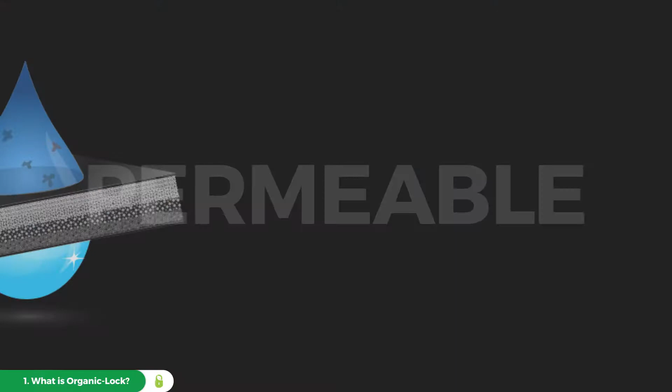Organic Lock is a patented powdered binder made from a renewable plant resource and a mixture of proprietary additives. It's designed to be blended with crushed aggregate to create natural-looking pathways and surfaces. The binder locks the aggregate in place to minimize erosion and minimize project site maintenance. It's permeable, ADA compliant, and qualifies for LEED points.

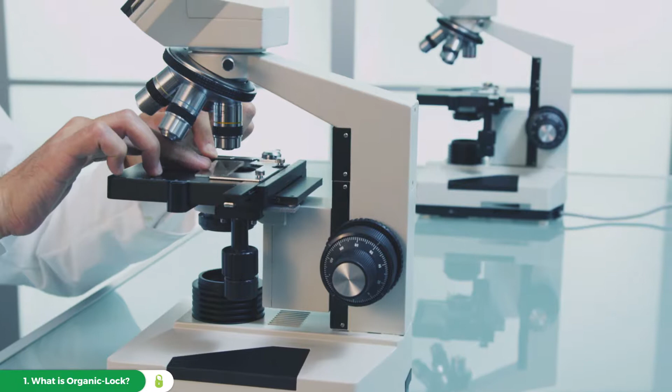The patented formula was developed from more than a decade of research by agricultural scientists from the University of Guelph, as well as the Federal Research Lab at Agriculture Canada. It's been used on successful projects around the world, from the pathways at the Brooklyn Bridge Park to the Disney Amphitheater in Shanghai, China, to the green roof on Toronto City Hall.

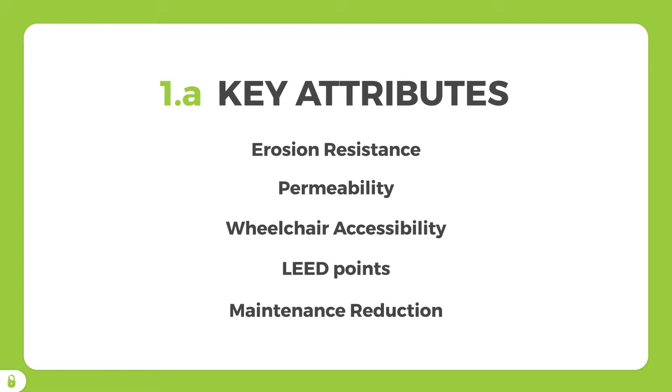As the water permeates the aggregate, it gets absorbed by the Organic Lock binder and creates a gel that coats the aggregate particles. The gel expands in size and holds the aggregate particles together, which significantly reduces erosion. Once the gel forms to its maximum swell volume, it's unable to take on any new water, so the excess water passes directly through the system down into the groundwater table.

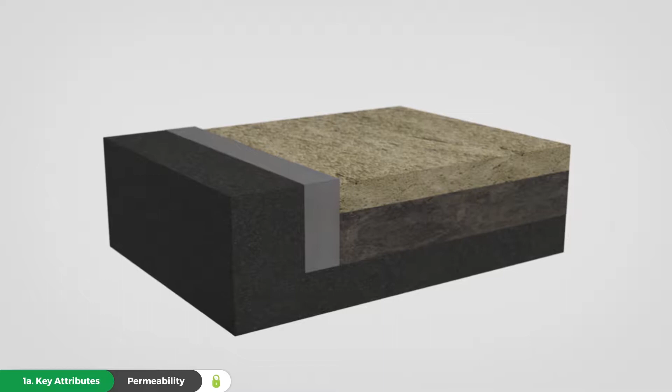Over time, the gel releases its water through evaporation into the atmosphere and through percolation into the groundwater table, recharging the system to be ready for the next rainfall. The structure of the aggregate combined with the gelling strength of the Organic Lock binder creates a stable surface that passes ADA wheelchair compliance and is suitable for a range of vehicle traffic.

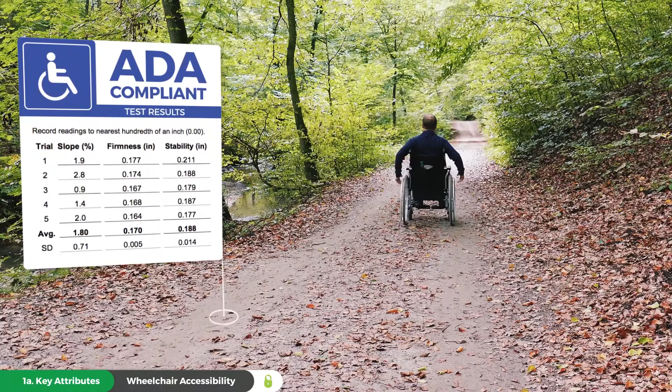LEED points are available for a variety of means depending on the specifics of your project choice. Organic Lock is activated and reactivated each time it comes in contact with water, which makes for a simplified maintenance program.

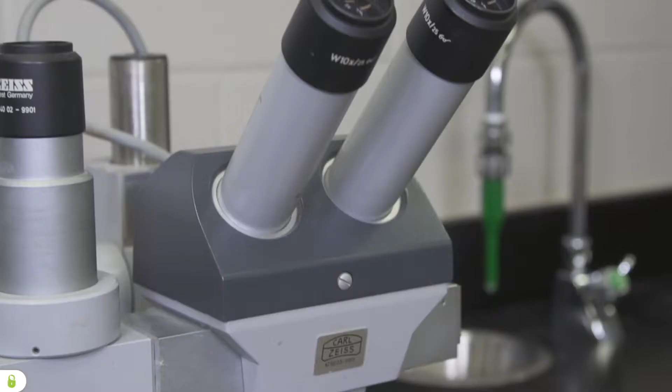More than a decade of research has been completed at agricultural universities as well as federal research facilities with a focus on biopolymer sciences and their interaction with aggregates. The binding strength of Organic Lock is closely studied in the laboratory and the field for a variety of different properties. Erosion resistance, strength and stability, as well as permeability analysis are at the front lines of this testing.

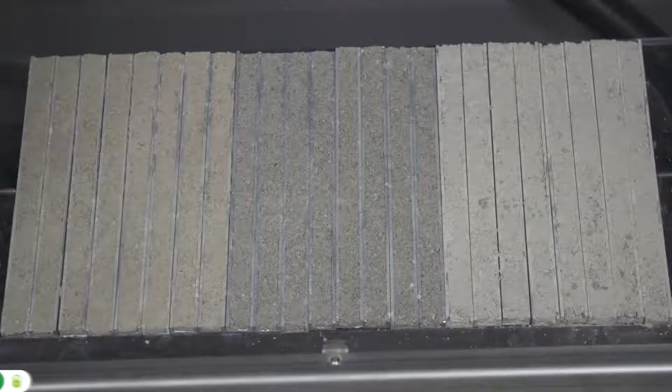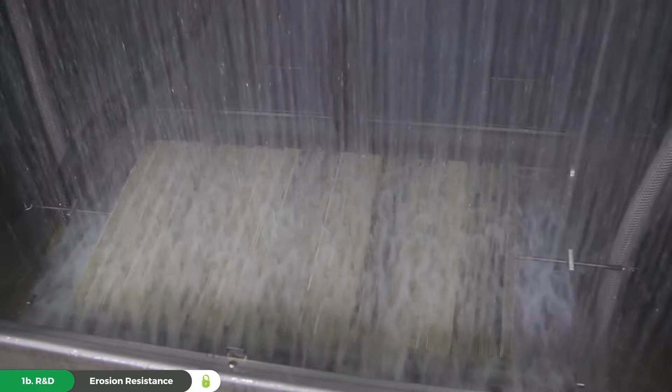The core focus for the development of the Organic Lock formulation is on its ability to resist erosion due to excessive rainfall. Envirobond uses a customized rainfall simulation device that provides consistent and comparative stress to each sample studied. By preparing samples that are subjected to a controlled rainfall simulation, Envirobond researchers have been able to understand the relationship between the binding strength and its ability to resist erosion. This has led to a patented formulation making Organic Lock the strongest organic binder on the market today.

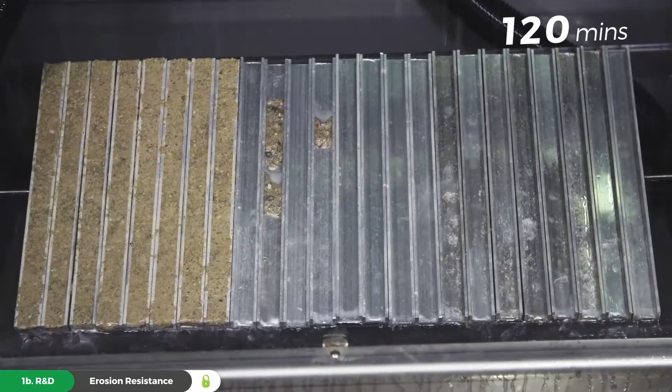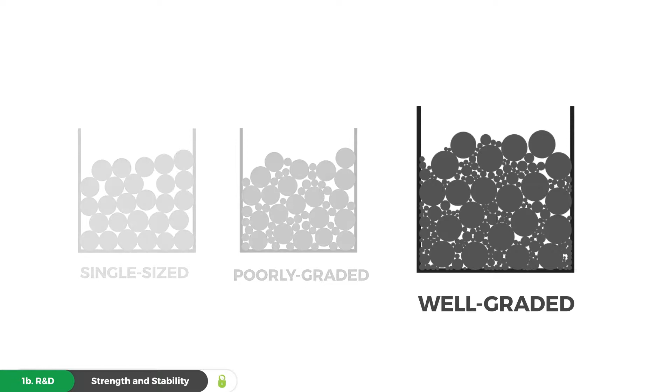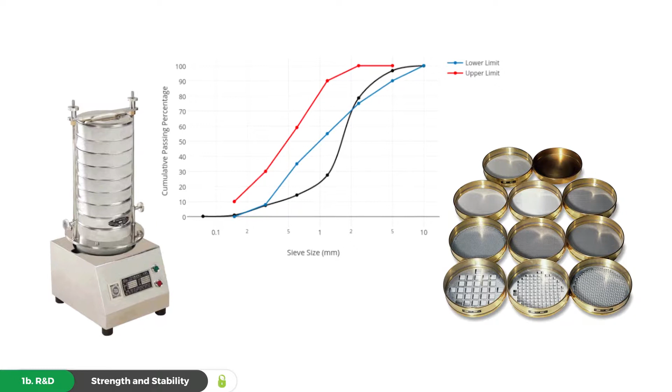Organic Lock blended aggregates derive much of their strength from the aggregate itself. The gel works best with the natural interlocking ability of well-graded crushed aggregate particles, which create an optimally structured surface. Only aggregates that meet the optimal gradation guidelines, which specify a detailed matrix of particle size distribution, are approved to become Organic Lock blended aggregates. Performing sieve analysis experiments on potential aggregates creates a strong understanding for expected performance in the field. Following these guidelines allows for a wide variety of options, taking advantage of local aggregate sources.

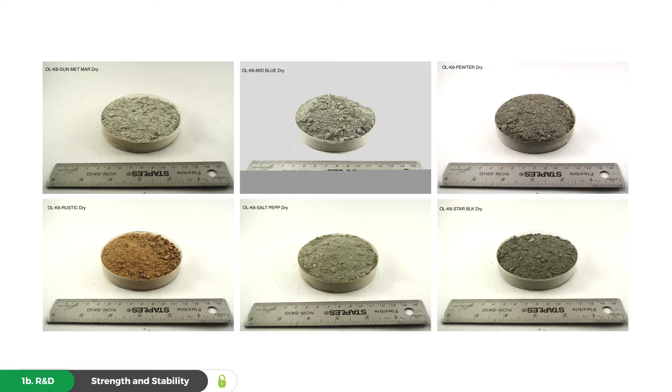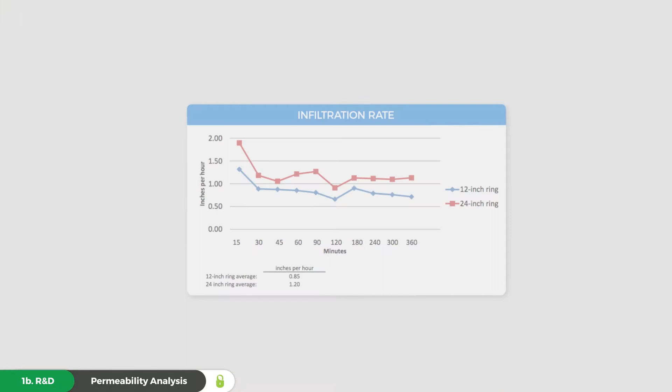In recent years, permeable surfaces have steadily become more relevant. Concern for the environment, especially water resources, has massively contributed to their popularity and promotion around the world. Because of this, water surface permeability is a significant issue for surface material choices. The water permeability rate of Organic Lock blended aggregate, determined by an independent ASTM standard double ring infiltrometer test, shows a rate of 0.85 to 1.2 inches per hour, allowing it to be installed in sensitive areas where water needs to get through.

When getting the pre-blended Organic Lock aggregate delivered by a licensed Organic Lock dealer, you'll need to pay attention to moisture content and optimal site preparation before the installation process can begin. Adding the optimal amount of moisture to pre-blended Organic Lock aggregate activates the powder into a gel that forms between the particles. The delivered aggregate will always have a beginning moisture content that may need to be optimized.

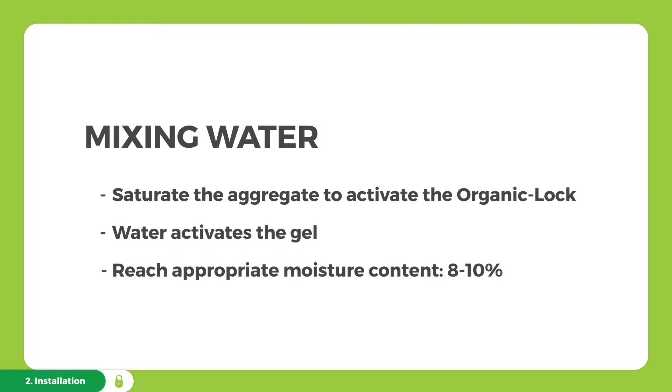To achieve the optimal water content, it's important to have an understanding of your starting moisture percentage. An appropriate ending moisture percentage will be between 8 to 10%, but is best established with a field test. The optimal way to establish ideal water content in the mixed product is with a snowball test. The snowball test is the act of picking up the blended aggregate and using both hands to firm and form a snowball. Start your first batch by adding small metered increments of water until you achieve a successful snowball.

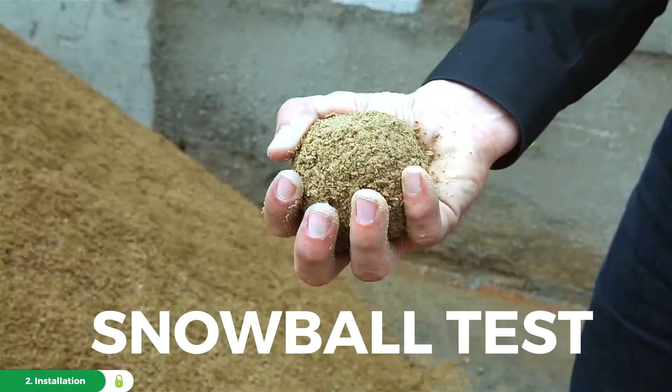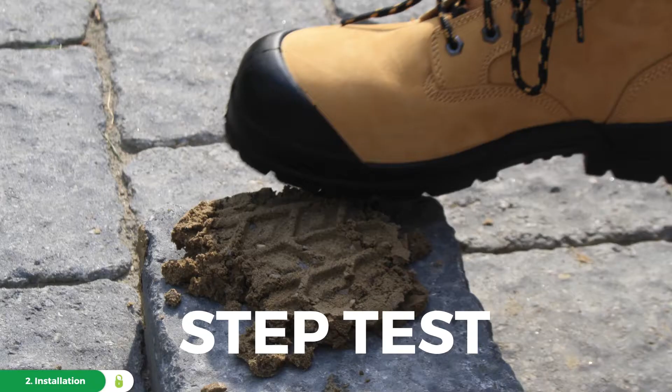The best thing you can do is figure out the exact water to add on the very first batch. Then, simply replicate it for each subsequent batch. If you find yourself with a batch that is too wet, the best thing you can do is add further dry material into the mix to dilute the moisture and return to a proper snowball. Now that you've got a proper aggregate, homogeneously blended with the proper amount of Organic Lock and water, the next step is the installation.

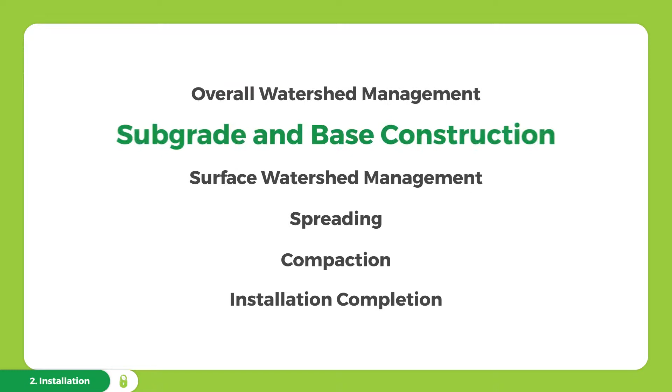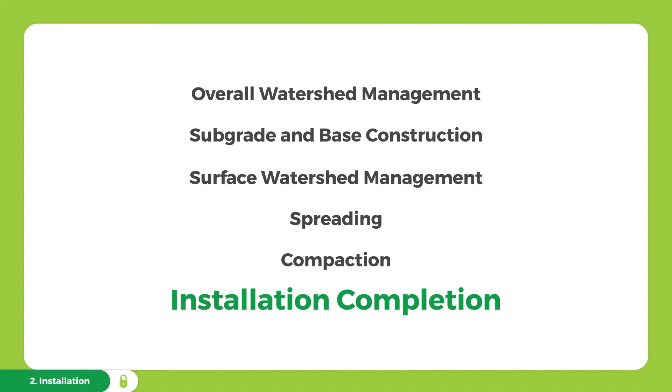The key elements for successful installation are overall watershed management, subgrade and base construction, surface watershed management, spreading and compaction, and finishing on the final spray for the completion of the installation. Watershed management is a simple but very important element of any successful installation. Managing the surrounding water will dictate the longevity of your surface material. As with any surface, you'll want to avoid any sitting water through proper slope management, but you also want to prevent continual flowing water in recurring and ongoing spots. This can be avoided through the use of swales, crowns, culverts, and drains in the surrounding environment.

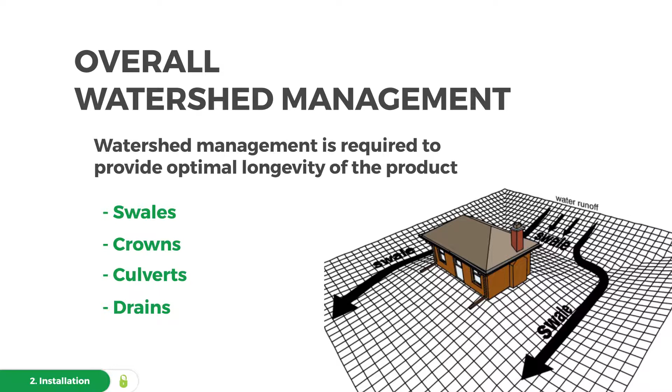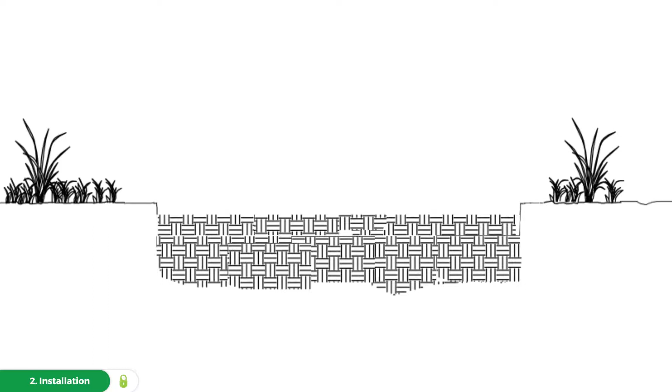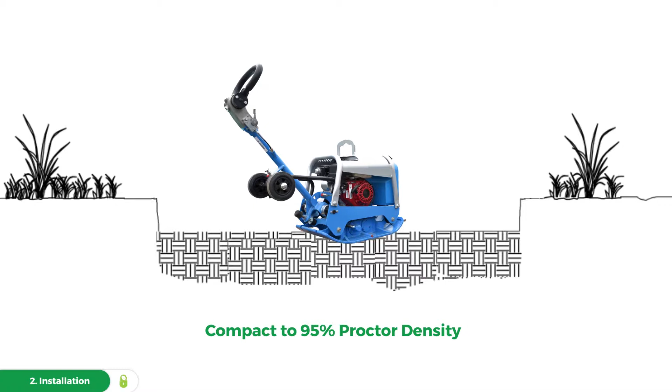The first step of installation is to excavate and properly prepare the subgrade to be ready for the installation. Excavate the proposed area to a depth related to your installation goals, which will allow for the proper depth of base aggregate, followed by the Organic Lock blended aggregate. Before adding in your base aggregate, you'll need to compact the subgrade to a 95% modified Proctor density using a compactor. Once your subgrade is compacted, you'll install your base layer at the depth required for your particular traffic type, as found in the related specifications.

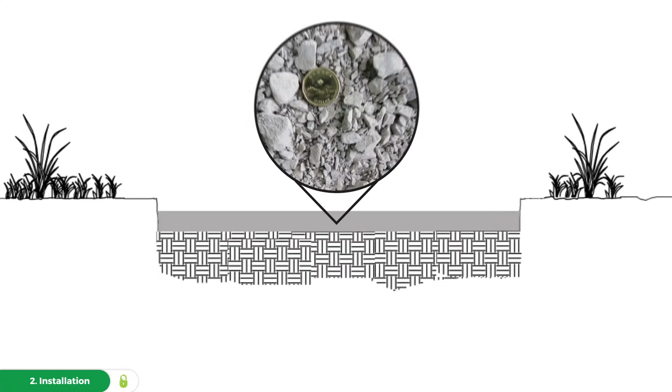The base material type is listed in the specification as your region's DOT recommended crushed granular road base. An example of this would be 3/4 crusher run or granular A material, with the most important aspect being the inclusion of fines in the aggregate material itself. In situations where the base layer calls for greater than 4 inches, you need to install the base in 3-inch lifts. Be sure to apply a fine water spray in between the lifts to create cohesion while optimizing the compaction. Compaction should be done with a vibratory compactor or minimum 1-ton roller and needs to achieve that 95% Proctor density.

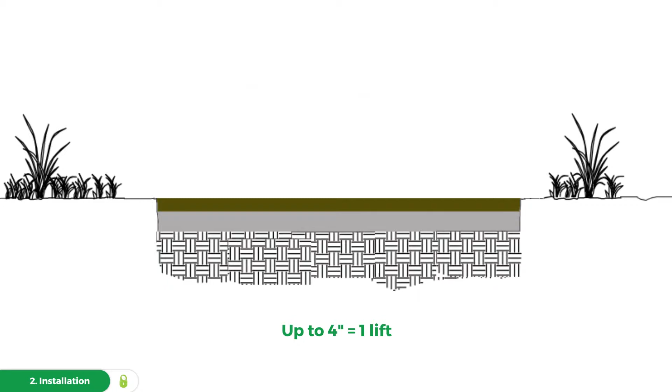With the successfully installed base in place, you can now install the Organic Lock blended aggregate. If you're installing up to 4 inches deep, you can install in one lift. If you're installing greater than 4 inches, you should do this in equal lifts with a minimum of 2.5 inches and a maximum of 4 inches per lift, with an additional soaking in between each lift.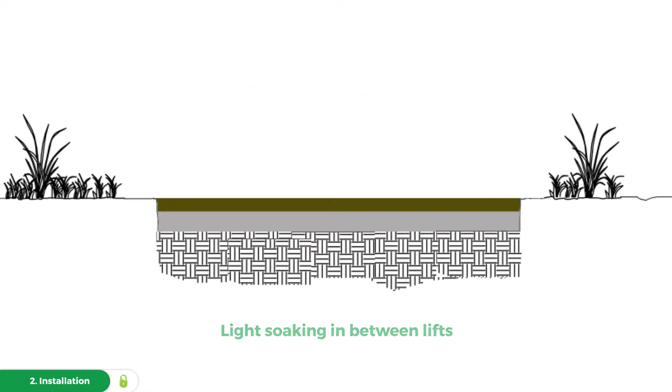It's always important to understand the effects of Mother Nature surrounding a project. Things like topography, ground cover, and canopy cover can have significant impacts on water flow over your project surface. It's important to guide that water flow where needed and avoid low areas, as sitting water on a pathway system is never ideal. Proper watershed management is best achieved by installing a crown or cross slope to divert the rainfall water to flow off the side of the surface.

An important note is to be aware of any man-made water sources that may have an effect on the area. Things like sprinkler heads that are facing your surface can have detrimental effects with long-term pooling. It's heavily advised to adjust this flow away from the product surface.

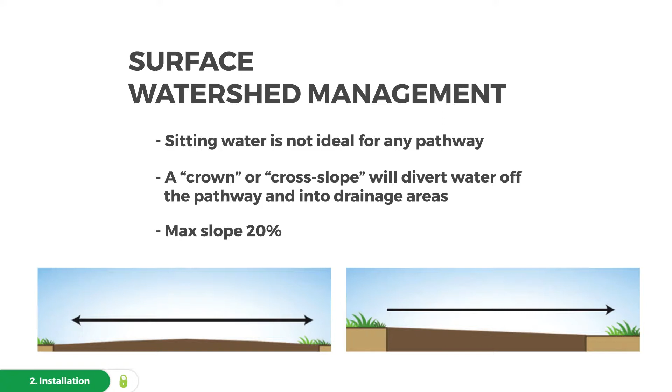The maximum slope that is acceptable for an Organic-Lock blended aggregate application is 20%. For slopes that are 10% or greater, we recommend installing runoff diverters, which are materials such as railway ties, metal troughs, or equivalent, embedded in the pathway at a 45-degree angle to prevent water gaining momentum, which can accelerate washout damage.

To determine how much product you'll need for your project, you can use the product calculator on the organiclock.com website under the Resources tab. If you know your square footage and traffic type, just go to the Resources section and drop down to Product Calculator. Select your traffic type and enter your square footage to establish your product quantities.

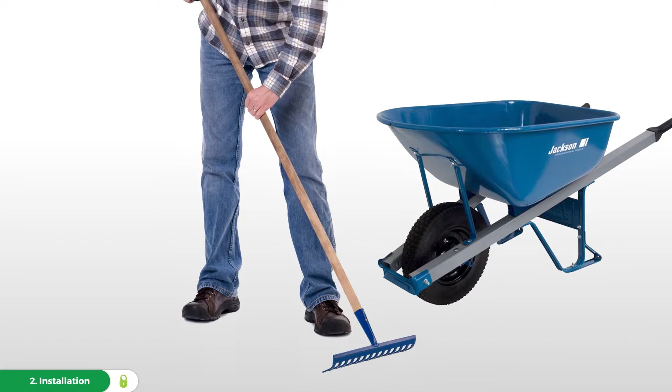In order to get to the proper compacted depth, understand that the aggregate will typically compact 20 to 25% depending on aggregate type, gradation, and starting moisture content. For smaller projects or tight spaces, it's possible to use a rake and wheelbarrow to spread the aggregate. However, extra precautions should be taken to ensure depth consistency over the entire project, as man-made installations can be prone to error. On larger projects, it's ideal to spread the material using a consistent mechanical means.

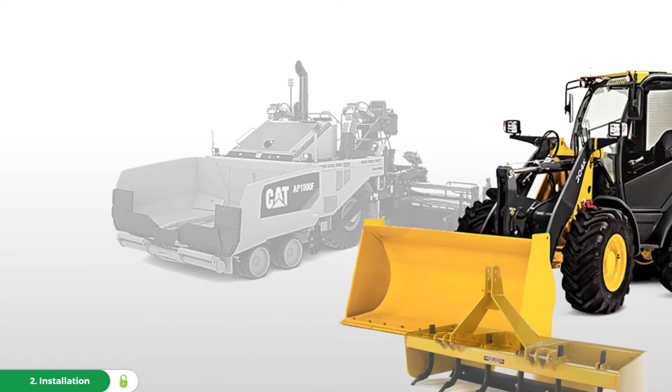Although using a paving machine is going to provide the most consistent results, this may not always be available. Where this is the case, back-dragging the blended aggregate can be done with a front-end loader or a box Gannon attachment. Since the material is being pulled behind machinery, there can be compaction issues as the tires drive over the material. This is something to be carefully considered and minimized wherever possible.

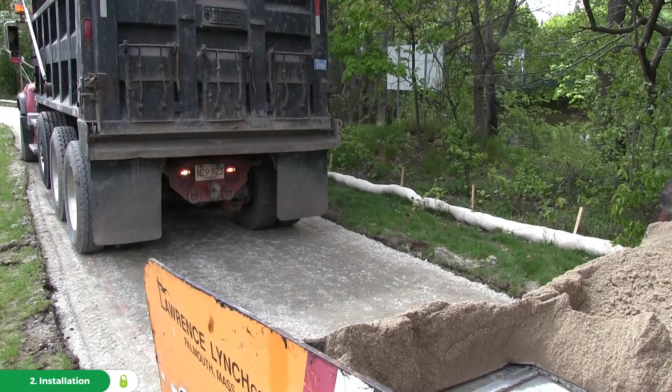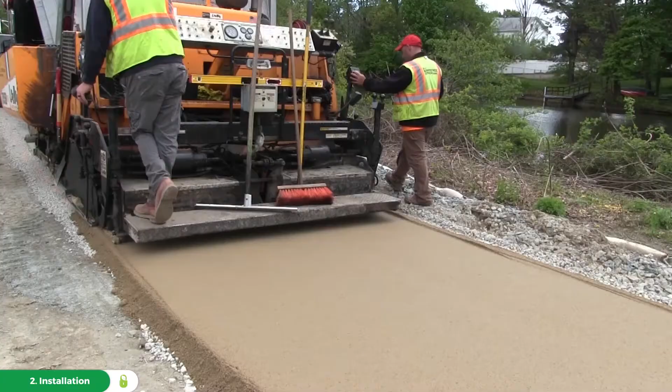Although there are multiple ways to spread the blended aggregate, for larger projects, the use of a paving machine such as an asphalt spreader is definitely ideal for consistency and efficiency. Using an asphalt spreader allows you to have the pre-mixed and pre-hydrated material delivered in a truck directly to the spreader. The material is dumped into the spreader where it is then dispersed at a set height on the prepared base. The asphalt spreader provides no additional compaction on the material while it moves along dispersing at a consistent depth of product. For larger projects, you can arrange larger trucks to continually feed the spreader as it moves down the installation.

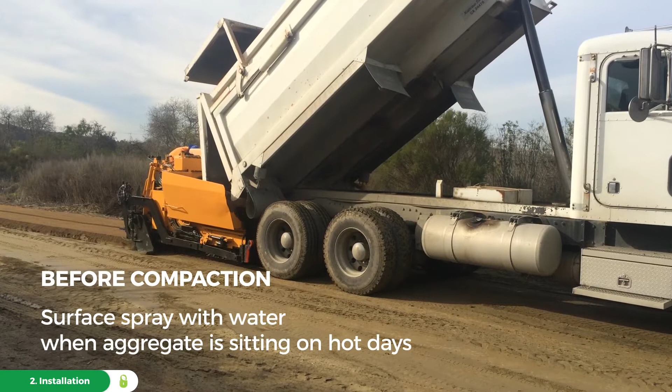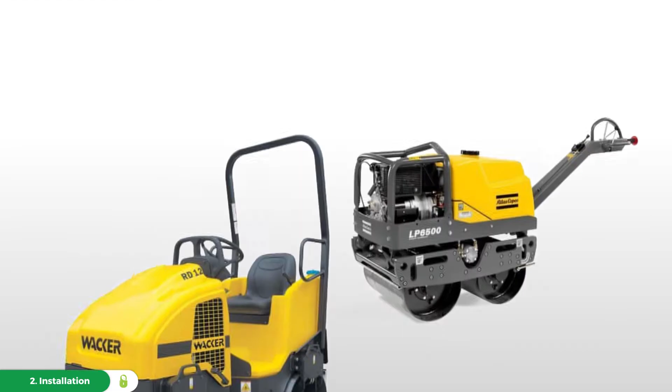Because the water is already blended into the aggregate, it's immediately ready for compaction after spreading has occurred. However, if during spreading the moisture levels of the aggregate drop because of ambient temperatures, for example on hot or really dry days, it's advised to lightly spray the surface to increase the hydration to optimal levels before the compaction. Compaction is done with a minimum 1-ton roller. This should be a static compaction and not a vibratory one, as the vibration can disassociate the bond.

If during compaction you're finding significant ruts, the material is moving around like jello, or perhaps is sticking to the roller as it moves, these are all signs of too much moisture. In this case, you should simply allow time for some of the water to evaporate out of the mixture. If it doesn't have enough moisture, you'll be seeing lines and cracks consistently throughout. To fix this, you can provide an even and light spraying of water over the areas of issue.

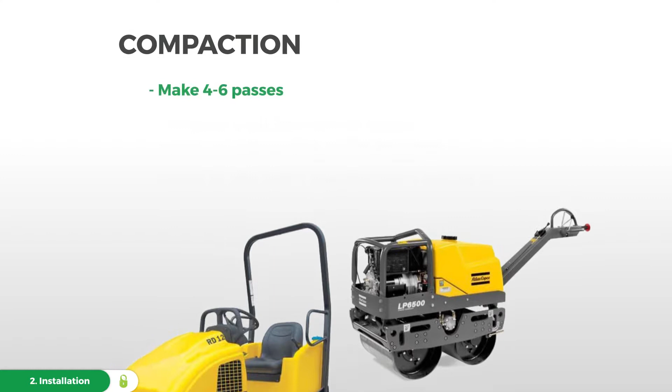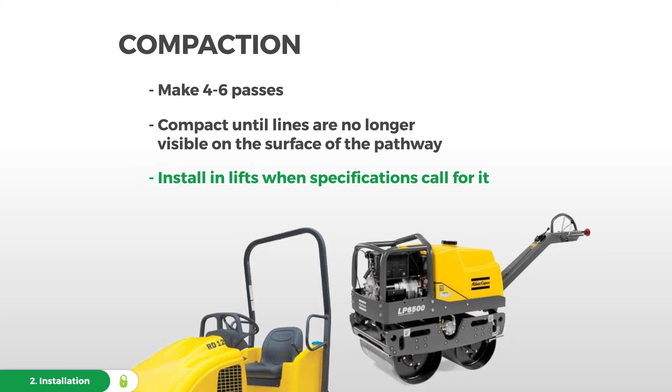Make 4 to 6 passes with the roller until you no longer see any lines on the surface. Pay close attention to the installation specifications to make sure you compact in lifts for any installation above 4 inches in depth. Hard to reach areas should be compacted using a hand tamper or equivalent. To complete the installation, you'll want to do your final soaking. The purpose for this is to make sure that any of the top layer material that wasn't properly hydrated gets a top-down soaking to make sure it's activated and can settle into the rest of the mixture.

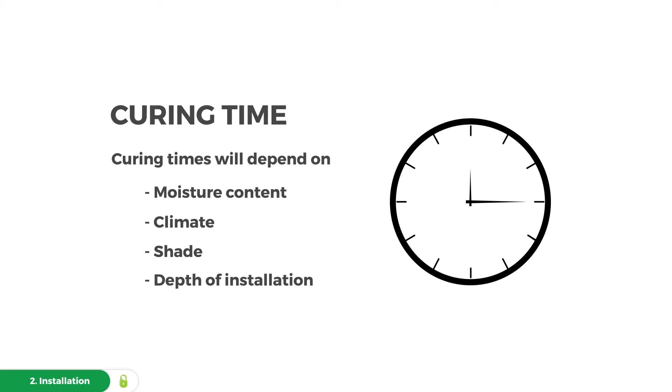Last comes the curing time, or in better terms, the time before first use. This actual time depends on moisture content of the aggregate, climate, canopy cover, and the depth of the installed material. However, we generally say 24 to 72 hours is the standard, but the longer is always the better. To establish timing for first use, simply walk on the material and feel if it's firm enough to allow traffic. If the material is dry on the surface but still feels a bit spongy below, then it's a good idea to leave it to cure for another day.

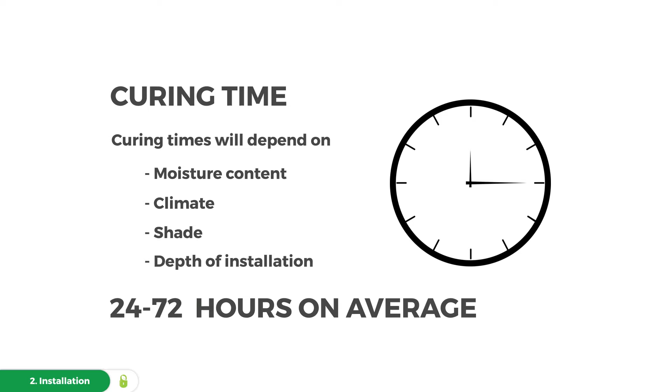Directly after the installation, the aggregate surface will be smooth because of the weight of the fresh compaction. As the surface weathers with traffic and time, the larger particles of the aggregate will loosen on the surface to create a natural look and feel.

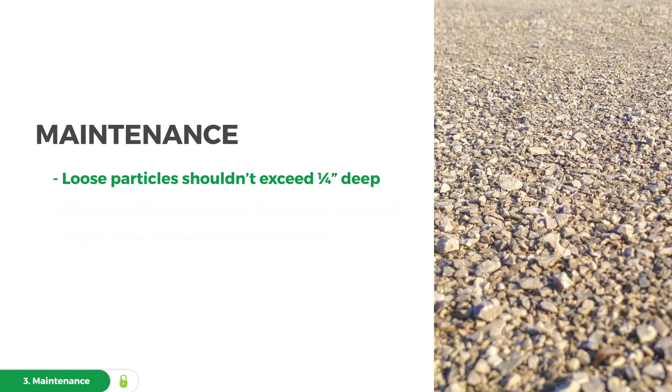It's important to realize that all outdoor products require some level of maintenance analysis. The loose aggregate particles on your surface should not exceed 1/4 inch in depth. If material exceeds 1/4 inch, redistribute the particles over the entire surface, water to 1 inch depth, and compact with a roller of no less than 1,000 pounds.

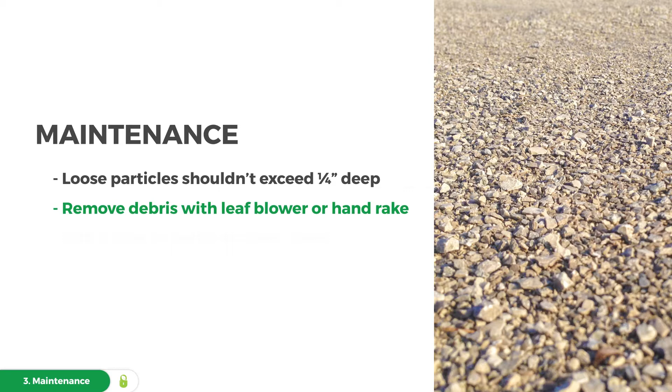You can remove grass clippings, soil, debris, or organic matter by mechanically blowing or hand raking as needed. When plowing snow, use a shoe lift or rubber baffle on the blade of the plow to lift the blade up 1/4 inch off the surface. Extra precautions should always be taken after the first snow and last snow of the season, as this is when the material is most prone.

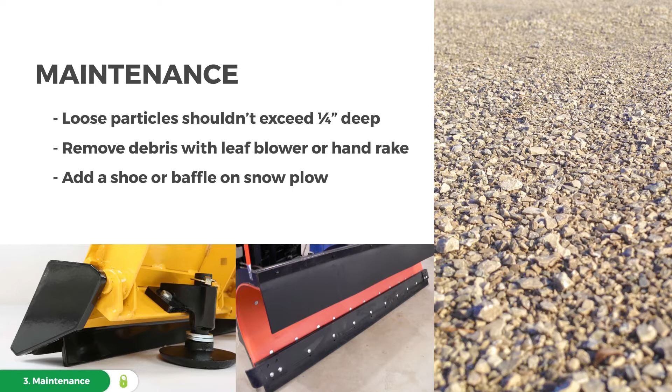Below the loose surface particles, the firm material should be stable to resist erosion and support the intended traffic. If this lower level material incurs damage, you can generally do a small scarification fix. These areas can be repaired by soaking, scarifying with a rake, and compacting using a roller or a hand tamper.

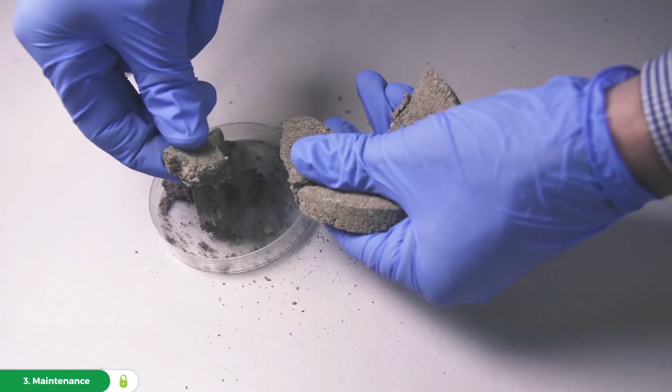The Organic-Lock gel activates each time it comes in contact with water, which allows for the blended aggregate to be physically broken up, reworked, and returned back to its initial state. This self-healing nature allows for a simplified maintenance procedure that leaves no sign of the maintenance itself.

For example, if you have to run an irrigation line below your finished pathway, all you need to do is add water, dig the material up, put down your irrigation line, spread the material back in place, then water, and compact it back to new.

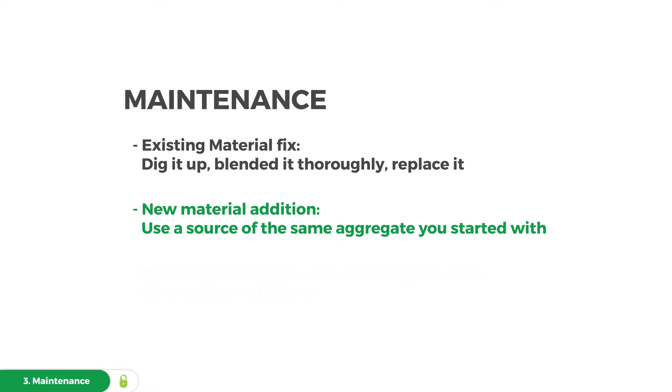Areas needing rejuvenation can be dug up, thoroughly mixed with new Organic-Lock, and reinstalled. When material needs to be added in an existing project area, it's best to use a source of the same aggregate you started with. Pre-blend it with Organic-Lock, then replace it back for a seamless result.

Our detailed architectural specifications are separated into traffic type and border types, and they can all be found on our CAD Details website, as well as our own website at organic-lock.com.

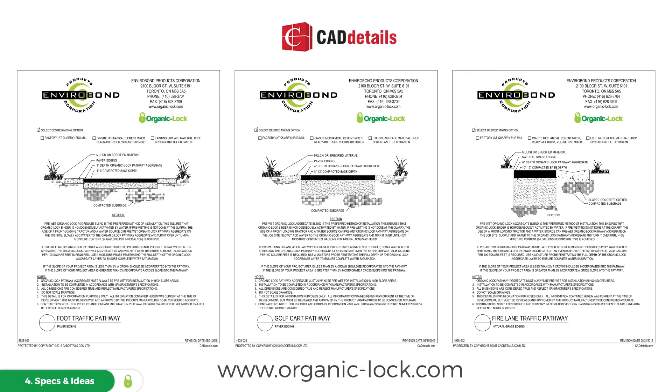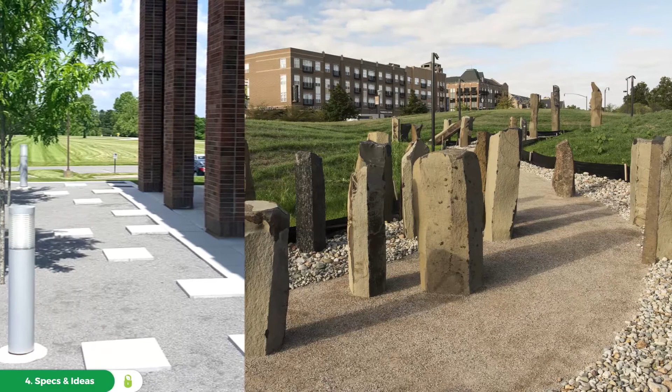Anywhere you're looking for a natural-looking, permeable surface that will stand up to traffic, you can think of Organic-Lock. Think of it for high slope applications, green roof applications, courtyard applications, heritage sites, artistic design. Notice the embedded pieces of natural stone throughout these projects. The Organic-Lock material will firm up around the embedded stone, keeping it in place.

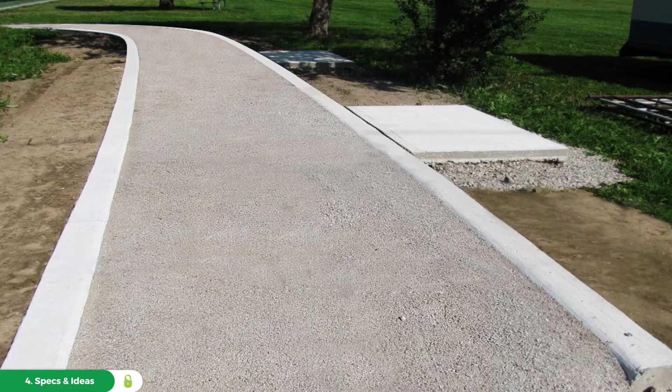Edging options are very much open to interpretation. Some designers prefer a natural bleed, while others prefer a clean line. A few examples of these options are concrete, natural grass, plastic edging, aluminum edging, and wood chips, just to name a few.

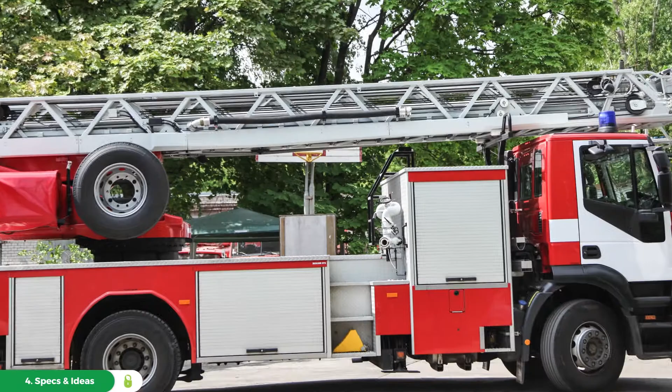Other uses for Organic-Lock include accent borders, garden edge barriers, wheelchair traffic, golf cart traffic, foot traffic, vehicular traffic, heavy vehicular traffic, natural parking lots, private residences, creative courtyards, high-profile locations, to low-profile areas off the beaten path. We always recommend taking advantage of local aggregate sources.

We also recommend working with a growing number of licensed Organic-Lock dealers across North America to get a pre-blended material that's been tested and approved to the proper standards. In locations where a local dealer is not available, Envirobond will work with your team to obtain a local option. We can also work with our existing dealer network to provide you with additional aggregate options that can be shipped direct to your project location.

This concludes our overview webinar.